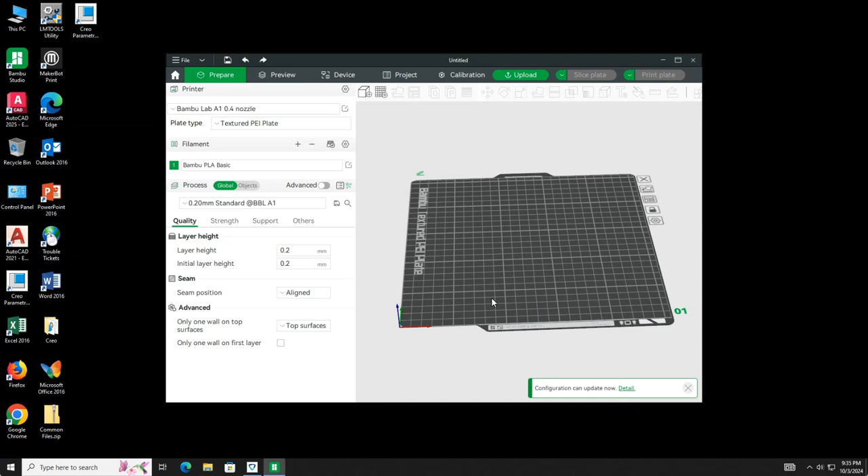Okay, but this is not the bed of our printer because this is referring to a Bambu Lab A1 and we have a Bambu Lab A1 mini printer. So we have to pull this down and then click on the A1 mini, and then the bed will slightly change. It is a smaller bed, but the same thing. This is the front, and you can hold left click, and then you can rotate that bed.

Now the quality of the print is already preset to a 0.2 on the layer height and initial layer height. So we're gonna leave that. The seam is aligned, and everything should be left as is. If you have a 3D model that has an overhang, you can turn on support, but we are not going to turn on support here. You can by checking this box, but we don't have any overhangs on our model.

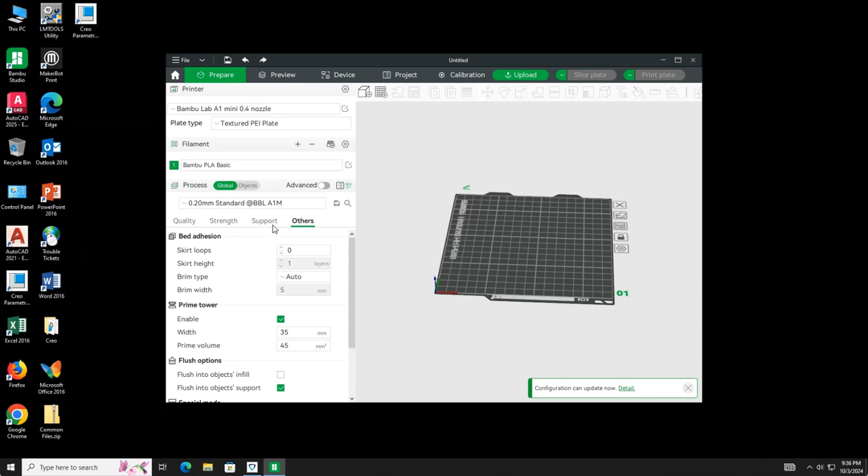Then the other two tabs here, strength, is going to talk about the fill of the 3D model. And then this one's going to talk about other details, including the prime tower and everything like that. So we're not going to change anything and then accept the default.

Next, we have to do a device, and the device that you want to use can be pulled down here. We have 8 new Bambu A1 Mini, and you can choose which one that you want to use. So if you want to use number 8, you simply click number 8, and then it will connect, and you should hit this play button. It has a camera, and you should be able to see the bed.

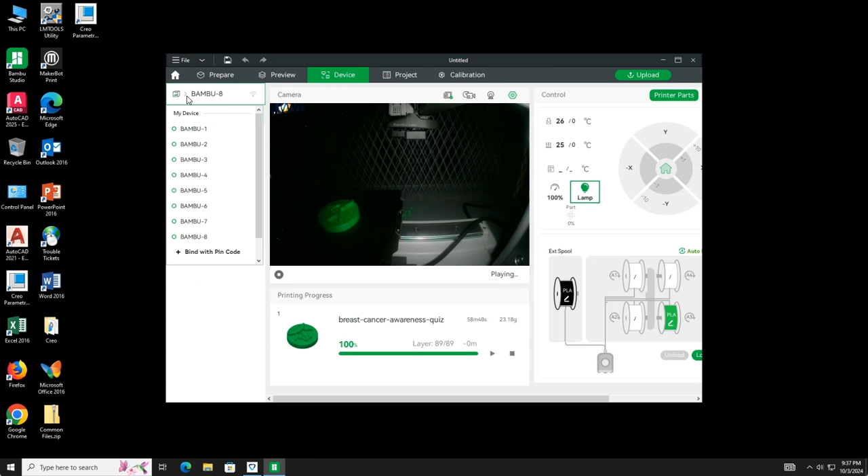I'm recording this around 9:30 p.m. so we can't really see anything, but you have a lamp switch here, so you click that lamp and it should turn on. You can see that there is something being printed on the bed, so we cannot use this printer. So just choose another printer and repeat the play, and then turn on the lamp if it's too dark. And it should show us whether there is something being printed, and there is currently something being printed right now. So we can't use that again.

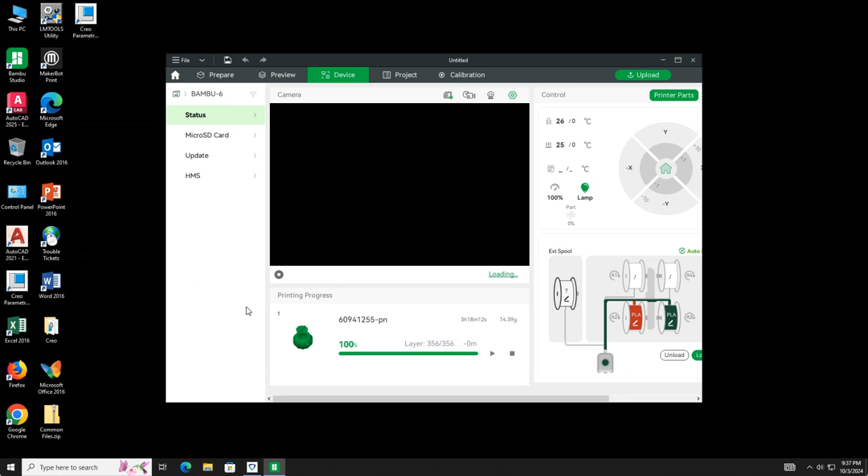So we choose another one, Bambu 6. It's loading, and then we can see that there's really none. Okay, but it's maybe too dark to see, so we just move on and pick something. Say Bambu 2. The lamp is on, it's playing, and there you go. So this one we can print on.

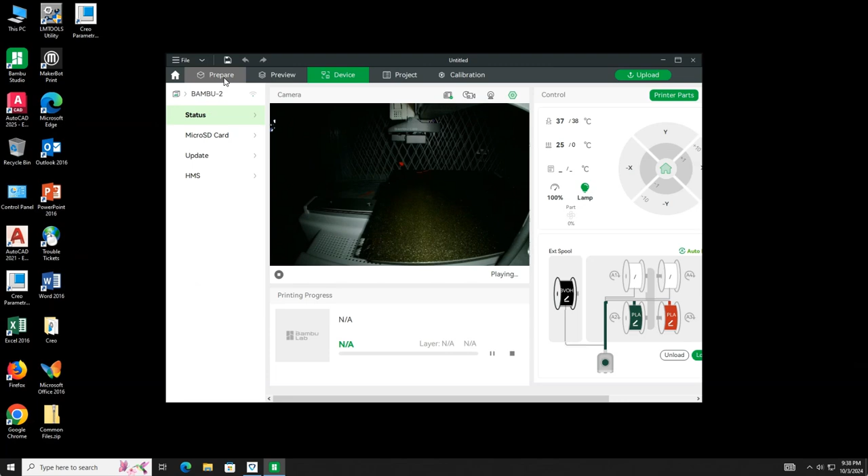If everything is full but it's finished, we can remove the print, but you have to tell the teacher first before you remove it. But yeah, it's better to check the camera and make sure that there's nothing being printed. So once we verify that we want to print on this printer because it's available, you can go back to prepare, and then you can find your STL file.

So I downloaded my STL file, and I placed it in my downloads folder. So here's the STL file, and all you have to do is basically drag and drop. So select, hold, drag, and drop. And then if your drawings are set to inches, then it will say, hey, this appears to be too small. Do you want to scale to millimeters? You just answer yes, and it would show you your model.

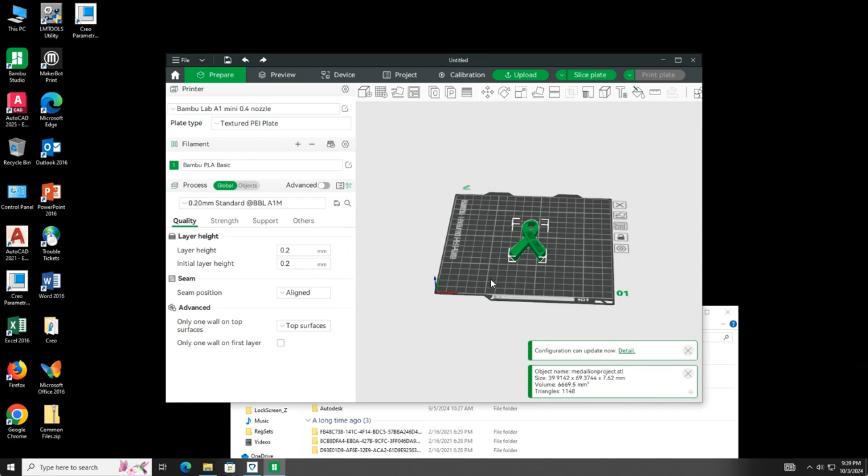So again, you can left click hold so you can look at your model, and that's how it's going to be printed. You can zoom in, okay, and then you can look at that model. So this is a student model that they created using Creo.

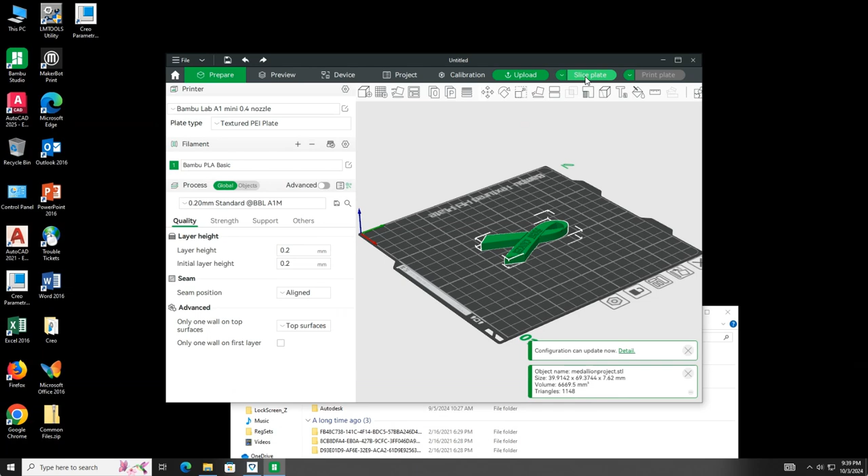Once everything is verified that it will fit inside the bed, nothing is hanging out, then the next thing to do is you want to slice the plate. Okay, so slice plate means that you want to ask Bambu Studio to sort of mimic how it's going to be printed. It will do some calculation. It will tell you like how much filament will be used.

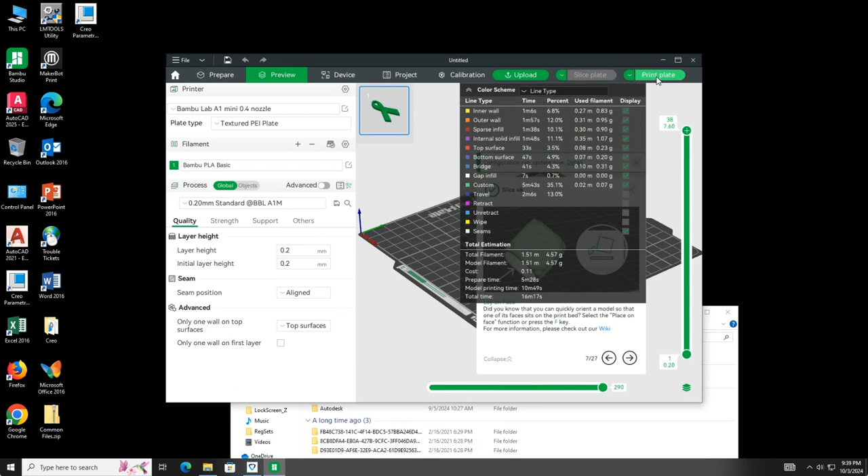And once it's finished slicing, you simply go to print plate, verify that this is the printer that you want to use. You can change your filament here, but we usually want to just select which one is loaded. Typically, there's only one, so you can change. If there's two, then you can pick which color you want to print it on.

Okay, and then once you're done, you simply click send, and it should start printing after a few minutes of heating up. Okay, but that's basically how to use Bambu Studio. Okay.